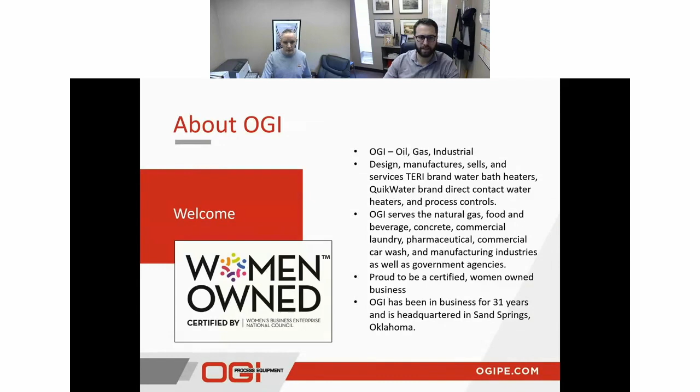Thanks, Chris. I want to start a little bit by walking you guys through our facility and capabilities if you're not familiar with us or our company.

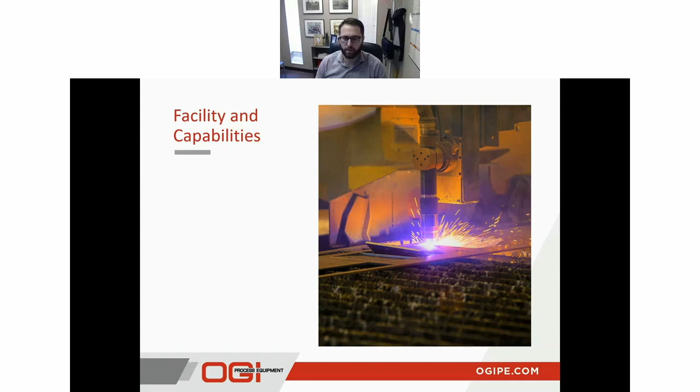Some of the things I like to highlight, most importantly, is that everything we do at OGI starts here and ends here. From the first quote you send us, we have a full engineering staff that will design and quote that for you. And then from there, we've got our own production facility where we design, build, and test everything on site, and we'll even perform a FAT on it before it leaves.

We've got a 50,000 square foot manufacturing facility, with several different things on site to help us through the manufacturing process, and we also have a UL listed panel shop.

Chris mentioned the Total Arc Relighter, which is one of our patented products, but we also do many other different control schemes for various things, which I'll address towards the end of the presentation. All of that is done in our UL panel shop, so we were able to achieve that certification on all the panels leaving our facility.

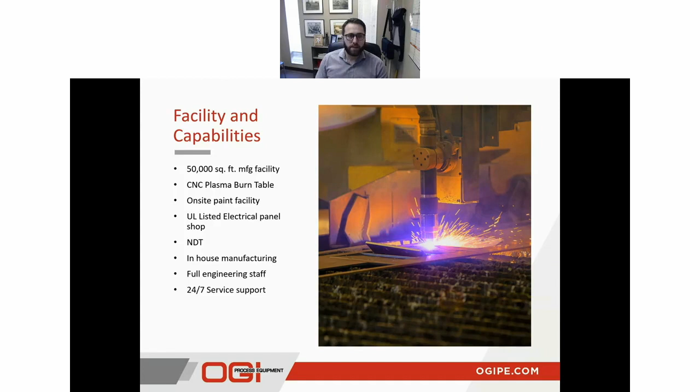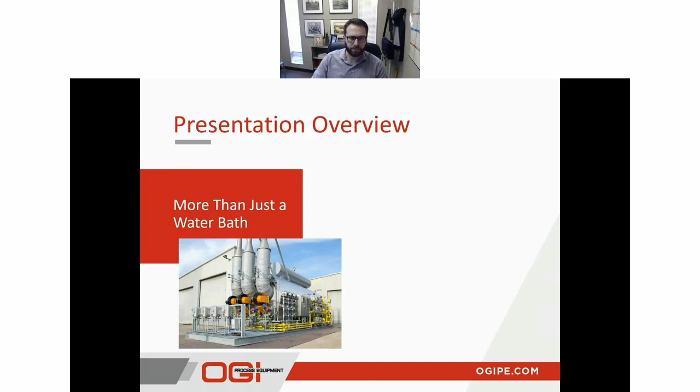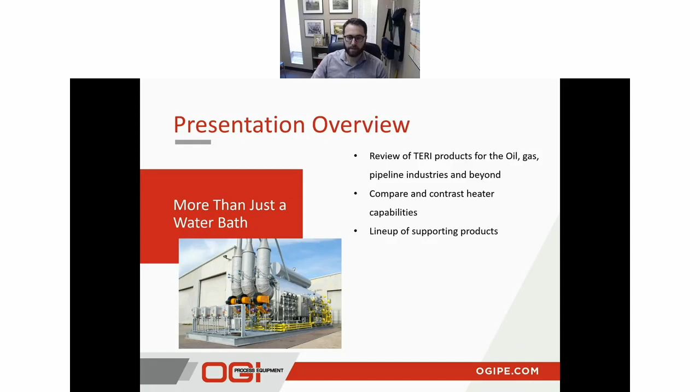So with that, we'll get into a little bit of the overview of this presentation. From the title, more than just water bath, obviously we're going to be discussing some of the different types of heaters that we offer. We'll review the different products for the oil, gas, and pipeline industries, and then compare and contrast some of the heater capabilities, both for water bath heaters and some of the other types of heaters we supply. We'll also review some of our supporting products, such as controls and some things like that.

So I broke things down to give us a better overview and be able to compare and contrast a little easier. We're going to start by going through our water bath heaters. On the left here, you can see the types of water bath heaters that we offer, starting with the natural draft, which is our most basic. We'll build from there into forced draft heaters, fuel gas heaters, vertical heaters, and finally electric heaters. After we've had a chance to review those things, we're going to get into an additional type of heaters, and review vaporizers and glycol dehydrators. A vaporizer is somewhat still a water bath, but it's performing a slightly different function, which is why I've broken that into a second option, and then we'll end with supporting products.

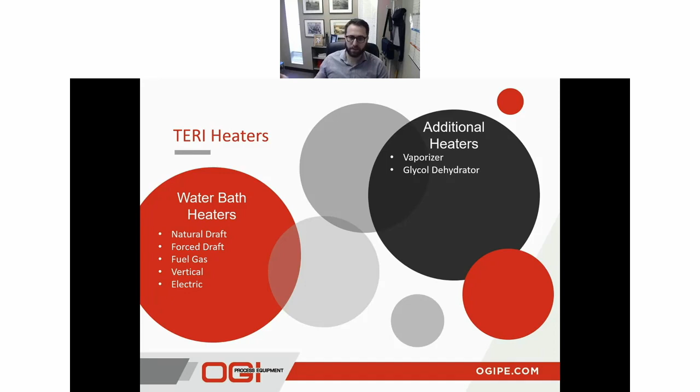So the first thing I want to cover is features that are going to be standard to all TERI heaters. Everything that leaves our facility is going to adhere to these bullet points that I've highlighted here.

For us, from an engineering standpoint, from a sales standpoint, and all of management together, it's very important to follow all the codes that lead our industry. So, most importantly, we're always going to be building in accordance with API 12K. Along with that, you'll see ASME CSD-1 for all of our fuel trains. And we're also going to be using NFPA 86 and 87 where applicable.

Even though these are not technically requirements, they're something that we'll often use based on the application, where the heater's going, or even if the customer requests it. So, all that to be said, if there are any specifications you need to adhere to that you're not familiar with, that's where we can come in handy.

We've got a lot of experience. We've been doing this, like Chris mentioned, for over 30 years. We've got a lot of experience here that can reference these specs and make sure the heater is meeting those and your controls are meeting those, and even help you outside of that with anything. So certainly, feel free to ask those questions when we're working on things together, and we're happy to help.

One thing I'd like to also highlight is our coils. The coil is one of the most important parts of any of these heaters, and that's why we take our inspection process very seriously. A lot of the time, we're really only required to follow the ASME standard, which is just to inspect one weld on the entire coil, and that approves it.

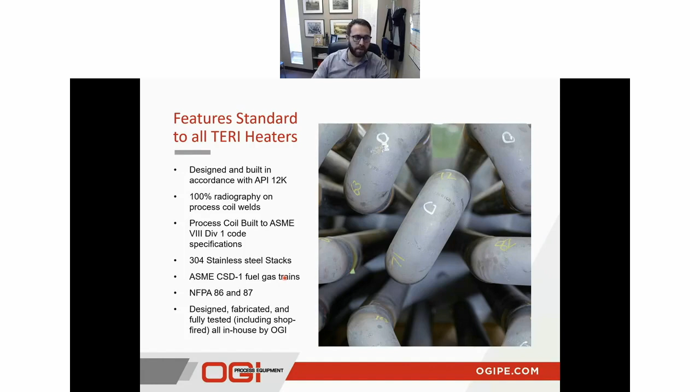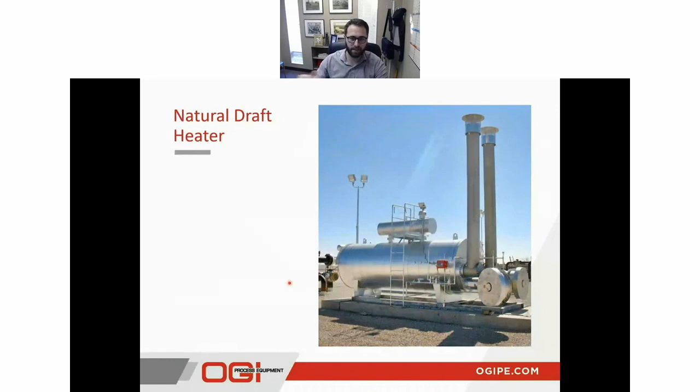So with that, let's get into our first heater. I'm telling you a lot of things you've already heard with this heater, but I just want to set that baseline to get us into the remainder of the heaters. The natural draft heater is just the most basic type of water bath heater.

It's a straightforward design. It's compatible with all different control schemes, whether you just want a simple push button all the way up to a BMS or even beyond that. It can do all those things; it really just goes back to what you're looking for. This is a heater that we use in a majority of our applications. Most of the time it's going to fit what you need it to do.

There are certain cases when this doesn't become as attractive, or maybe it gets ruled out, and that's when we start to get into our other types of heaters, which we'll address and compare throughout this presentation. This is available in 1 to 3 fire tubes. As you can see here, the reference picture I've got is actually a dual fire tube. We see those all over the place.

More often than not, there's going to be a single fire tube, because they're usually handling a lower flow rate and pressure drop and things like that. But if we need to get more heat into the system, we can get up into those triple fire tube designs.

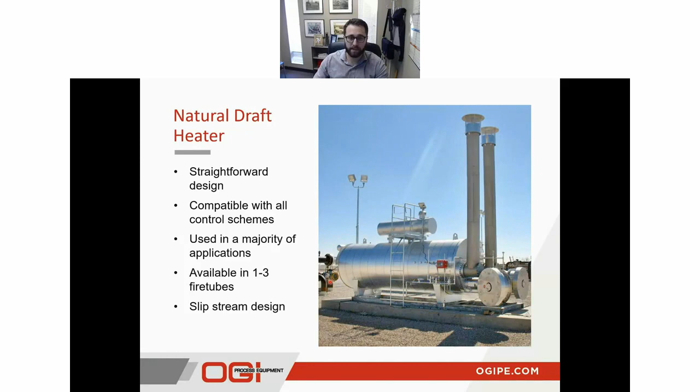The second to last thing I want to talk about is the slipstream design. I'll address how it can be used throughout different types of heaters, but the slipstream design is becoming a very popular aspect of all of our water bath heaters, and it essentially allows us to use a smaller heater, or maybe fewer heaters if we need several heaters in parallel, but still get heat into your system.

So essentially what we're doing is bypassing part of the coil, taking a hotter gas, not superheated, and blending that with the cool gas to get to your process temp. So we're still able to avoid any Joule-Thomson effects while getting it into a smaller footprint.

It seems from our perspective, there's getting less and less space, but we're seeing more and more need for gas, and so things like this are becoming more popular. And so something that's definitely applicable for the natural draft heater, and other heaters as well.

And finally, a good thing to remember, with the natural draft heater, our max output is going to be 15 million BTU per hour. So that just kind of sets the limitation of what we can do there with a single heater. Granted, we can put, like I said, multiple in parallel, or that's when the slipstream comes in if we need to get more heat into the system, but we've got that 15 million maximum requirement.

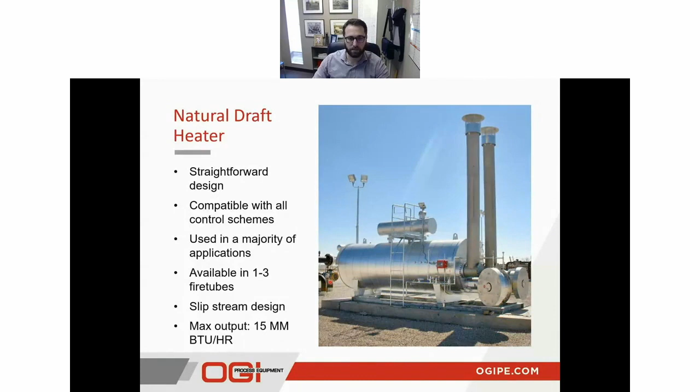So now we'll look into a forced draft heater. So this is kind of the next step from a natural draft heater, and this is going to be used in a situation where you might have a high flow application. So maybe there's more flow coming in than we can handle with the natural draft heater, and you don't have the space for more heaters, or even if you do have multiple heaters on site, you still can't achieve quite the requirements that you need. So that's when we come to the forced draft heater.

It does require more advanced controls. Typically, you can't really get away with just a relighter or a push button on these, because we've got a pretty advanced burner on this, as well as process controls that we need to be keeping an eye on and managing from a control standpoint. So you're typically going to see a BMS or maybe some type of custom controls on this. So that's something to keep in mind when you're looking for forced draft heaters.

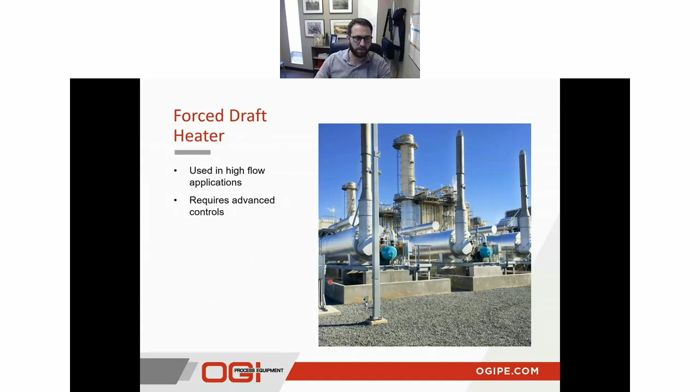Another big advantage to them is that they can meet low NOx and ultra low NOx requirements. So more often than not, when we are selling these and the customer is using them, it's because they have some type of emissions requirement at their site. And so that's something we can meet with these heaters. They are a more efficient design. So with the natural draft heater, you're only about 68% efficiency. With a forced draft heater, you get up into the mid 70s on your efficiency. And so we get a lot better combustion by forcing that air into the heater rather than using a natural draft through like a flame arrestor.

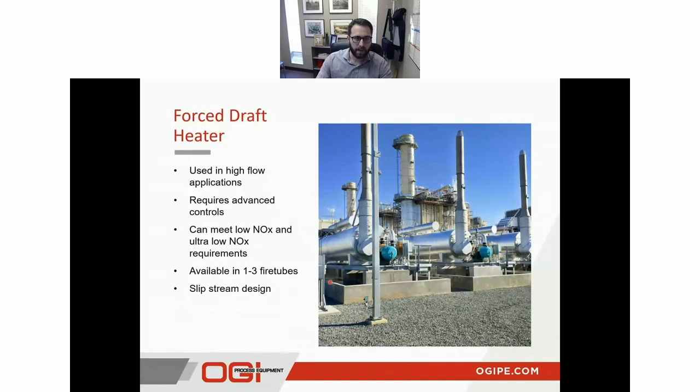It's also available in 1 to 3 fire tubes, and we can also do the slipstream design with this heater as well. And finally, just addressing the burner. So if you notice on our last slide, and I'm sure you guys are all familiar with flame arrestors, we're just naturally pulling in that air. And then this is what we would be more dealing with on a forced draft heater. We've actually got a burner and a blower.

So like I said, getting a more efficient combustion into the system, which is actually what allows us to get a better overall output. So we're going to be over 15 million BTU per hour on this heater rather than under, like we would with the natural draft. So it's a very helpful feature when you're needing, like I said, more heat input into your system, or possibly need to meet higher conditions.

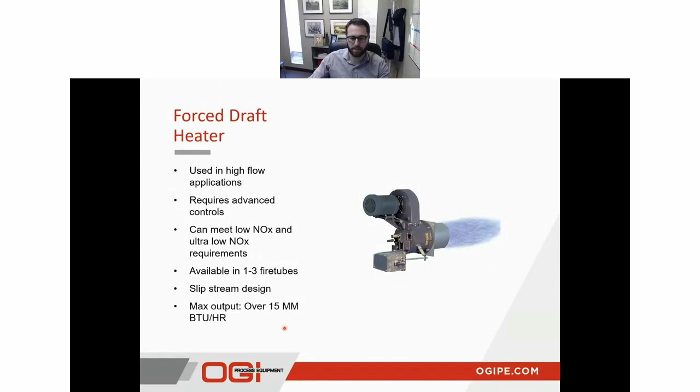So next we'll discuss the fuel gas heater. And for the most part, a fuel gas heater is not going to differ too much from a natural draft heater. Maybe in a non-educated person's view, it's just going to look just like a normal natural draft heater. The main difference is that we're going to have wider or tighter gas temperature control ranges on the heater, because with these type of heaters and their applications, we're really just taking a natural draft heater and using it in a different application. So it's important that we have more control over the temperature output of the heater's gas.

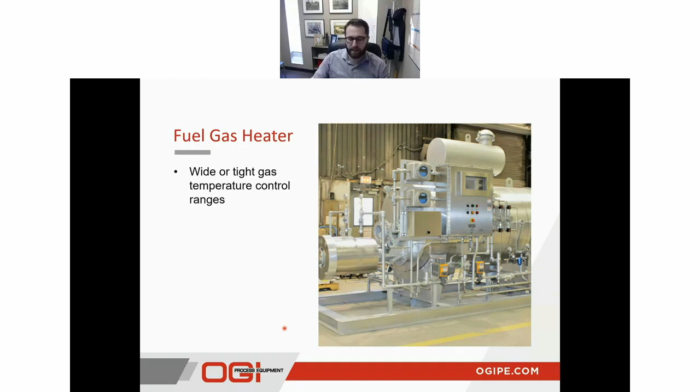And so how do we achieve that? That's through the controls, which I've highlighted here. So that's what I was saying, if you just glance at this, like, oh, that's just a natural draft heater. But maybe if you know a little bit more, you'll see, oh, this has got some different controls going on there. And so this specific one, you can see we've got a Honeywell BMS.

We still can use a slipstream and even a tempering control configuration to make sure we're getting the proper gas temp. Also, if you're having sulfur problems, it's great for elemental sulfur control. And then with these heaters as well, oftentimes we will be superheating our gas to get to those higher levels. And this one, like I said, because we are at that lower natural draft design, we are going to have a max output of only 15 million BTU per hour.

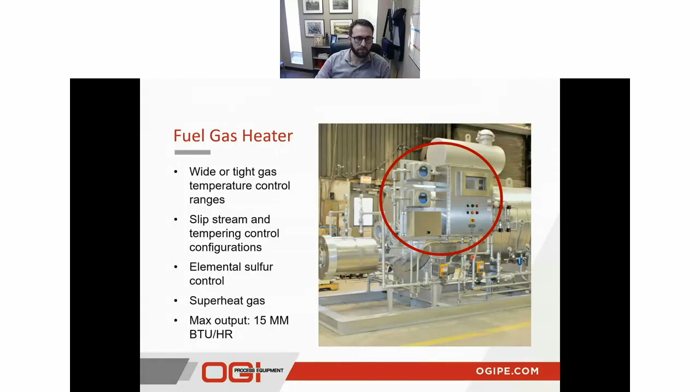All right, so next we'll discuss our vertical heaters. This is another one that's actually becoming very popular as well, for multiple reasons, which we'll highlight here. But as you can see, it's definitely a different design. The name's not very creative. We're just taking the horizontal heater and making it vertical. But from that, the internal design of the heater does change quite a bit. So as you can see, we've got a little bit different design.

So right here, this blue is going to be our burner. And we'll have a single fire tube here rather than multiple fire tubes like we would on a horizontal heater, exiting through our stack, and then our coil will come down around this fire tube so that we get good heat transfer between the heated bath media and the coil.

And through this design, we actually end up with a higher thermal efficiency than we would with the natural draft or forced draft heaters. And that mostly has to do with just that we're fighting less of the physics that you would be fighting with a horizontal heater. So that's why we see a better thermal efficiency on these heaters than the other ones.

Another obvious feature, we're going to have a smaller footprint, which is what's making these more and more popular, especially if this is going to a residential area or near a residential area. These are a lot less noticeable than some of those big horizontal heaters. We've even done some of these that are actually enclosed in a building, and so it looks like just a building with a stack, and it's hardly noticeable outside of typical utilities you would see around the neighborhood. So these are a very great design and good for those types of applications.

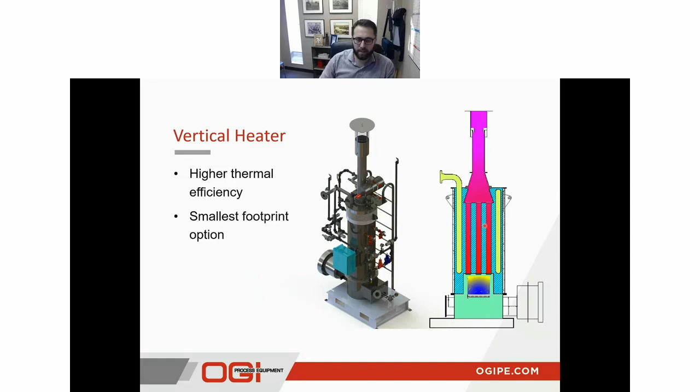Another thing I want to address is, we do have a quiet burner assembly on this one. So another reason it's going to be great for residential areas, it's going to be a lot quieter than some of our other heaters. And that's due to the type of design the burner is. I always compare it to like a turkey burner or something like that, where instead of just a single point of a flame like we would on a horizontal heater, we're going to have multiple nozzles here. So each nozzle you see here is going to be a different flame. And that leads to an overall quieter burner, which is where most of your noise is going to be coming from on these heaters. So that's a good benefit to these as well.

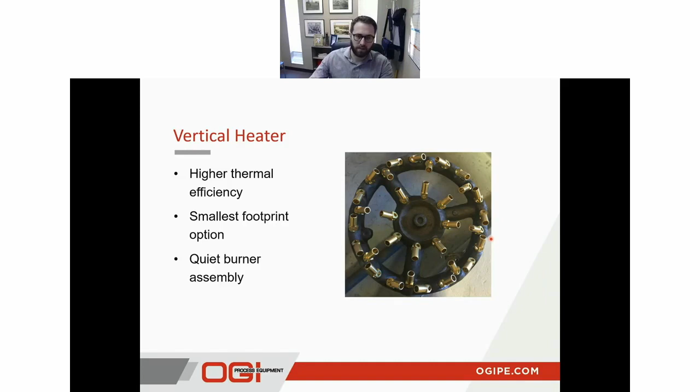The only limitation to these heaters is going to be the actual output itself. So looking at some of our other heaters, this one's only going to have an output of about 500,000 BTU per hour. So as far as output goes, it's going to be the lowest of our heater range. But for some of those residential applications, it's going to be a great fit because more often than not, you're not going to need that higher output. But just something to keep in mind as you are planning out these different projects.

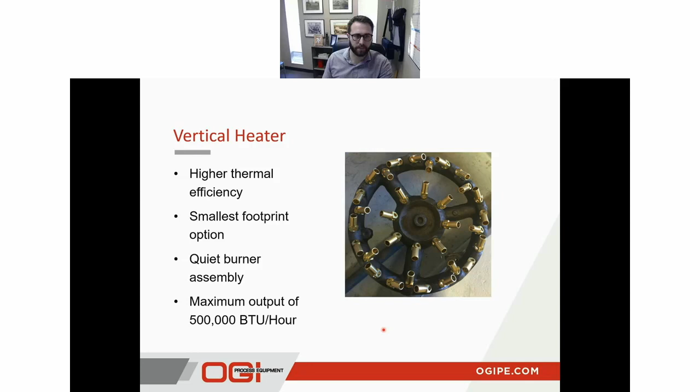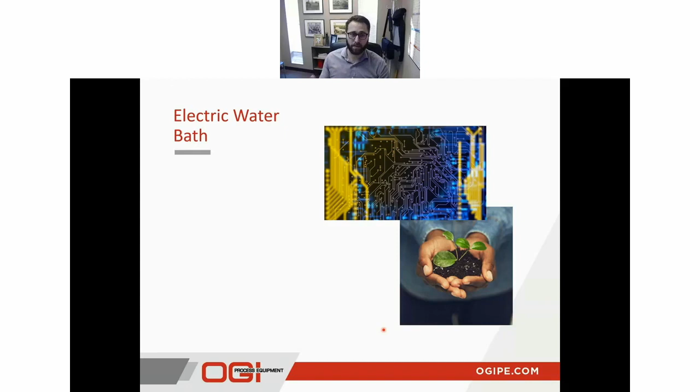So finally, we'll get into one of our newer products, which is an electric water bath heater. This has come about as part of our ESG planning, and that's because it's going to be the lowest emission option, obviously. We're not going to be having any type of combustion with the heater. We're simply going to be relying on electric coils to get the heat into the bath to transfer into the natural gas. So we've started getting this more and more out there in areas like California, Oregon, places on the West Coast that might have really tight regulations as far as emissions go.

That's something we're pushing more and more into that area, so it's a really great option for that. This is going to have very minimal operational noise. I mean basically nothing, because you have no burner again, really nothing else going on. It's going to be, in most cases, as quiet as a heater you'd have in your home.

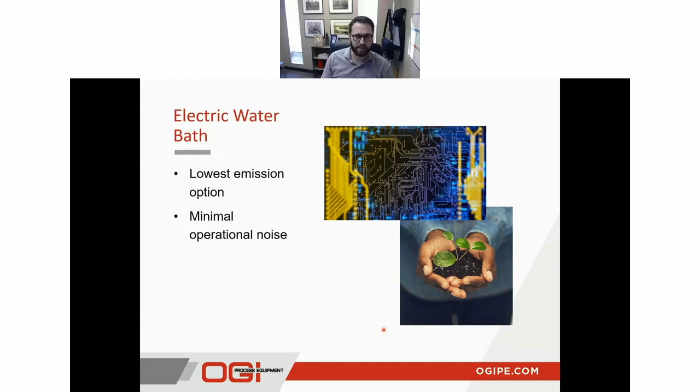So it's a great option from that standpoint as well. Another thing is the max output is going to be about 1 megawatt, and that's just kind of where our design limitation is right now. Granted, you could put these also in parallel or series and kind of increase your heat from there, but that's something that is still kind of in the design phase with our R&D group.

Just to give you some perspective on that, 1 megawatt of electricity is about 3.4 million BTU per hour. So that gives you an idea of where we're falling on that line of other natural gas fired heaters. Certainly not bad, still better than the vertical heater, but it is a little lower than some of the other heaters.

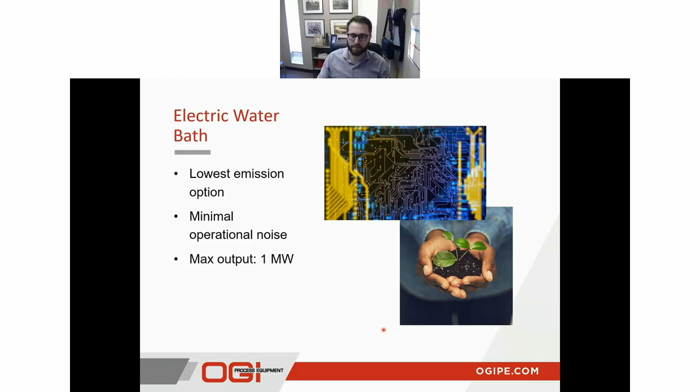Now that we've reviewed all those, I just wanted to take a second and look through the comparison. So I chose a few different categories that, for me, when I'm talking with somebody who's not exactly sure what heater they want, these are some of the questions that I ask, and it's good to think about for you guys, or also ask your customers when you're going through these.

The first thing is low NOx capabilities. If there's any type of requirements, as far as NOx emissions or things like that, that's when you immediately want to go to a forced draft or electric. Obviously, as I mentioned, in most cases you're going to end up at the forced draft just because of the output. If you remember, this is only about 3.4 million BTU per hour.

In most cases, you're going to need a forced draft, which we can get our emissions very low on. In most cases, with the regulations that we see nowadays, we can satisfy any emission requirements. It's only in certain areas, like I said, and it might even be by local levels of their requirements that you might need to get into an electric heater. But for the most part, that forced draft is going to check that box on the low emissions requirements.

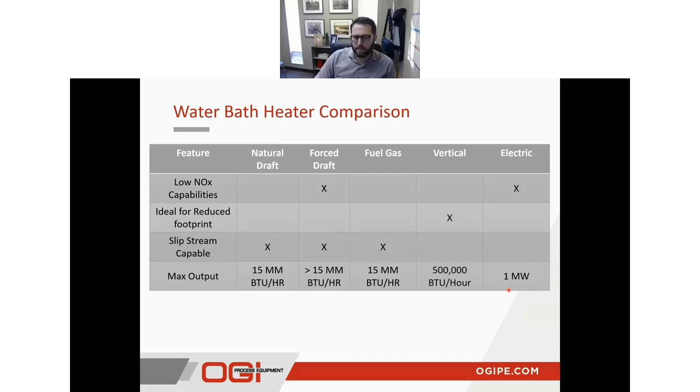So next we'll get into vaporizers. These next two heaters, the vaporizers and the glycol dehydrators, again are similar, at least the vaporizer is similar to a water bath, but they're performing slightly different functions. So I've broken those out because of that.

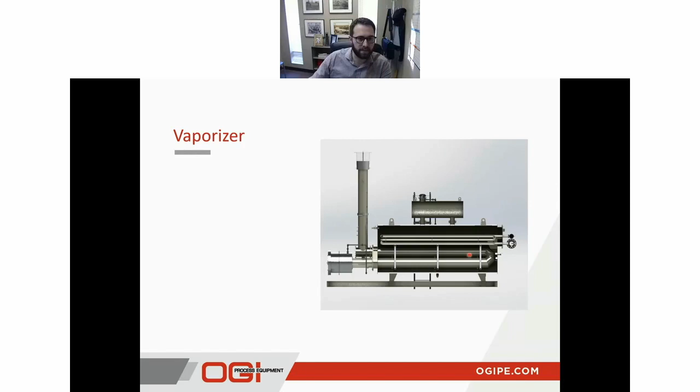Looking at a vaporizer, it's going to be very similar to what you would see on a water bath heater. You're still going to have a single fire tube, a coil, and bath media that all this is immersed in to transfer the heat. But the main difference is that our coil design and use is going to be much more important in the way that it's used rather than with our other natural gas heaters. With a natural gas heater, you can flow gas in either direction because we're just flowing vapor through there, right? There's no liquid or anything like that. But with a vaporizer, because we're flowing propane in there and the whole point is to vaporize it, it's very important that the direction of flow is maintained and used properly.

If we were to flow propane into a vaporizer on this upper coil and try to flow down, we're going to be fighting gravity, and we're going to have a very poor heater, probably one that doesn't even function, because our vapor is going to want to exit back this way. All of our liquid's going to want to settle down here, and we're essentially going to end up with liquid into our pipeline, which defeats the whole point of the vaporizer. So that's why it's very important that the direction is maintained and that we're flowing into the lower level, so the vapor has a chance to separate from the liquid and rise up through the coil.

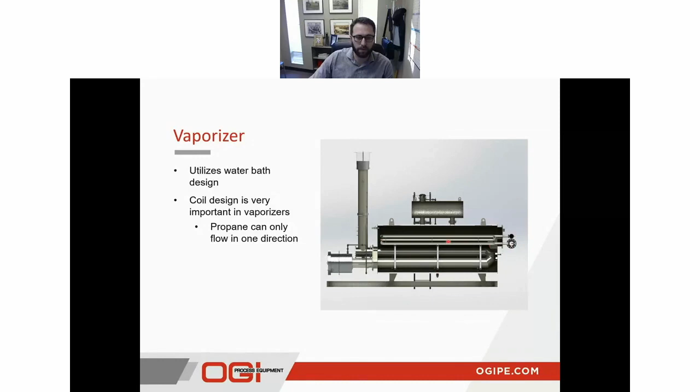And the last thing, the vaporizers do use slightly different codes than some of the other water bath heaters. Granted, we're still going to be using API 12K, CSD-1, those type of things. But there are three other codes that we'll be using, which are the DOT 192, NFPA 59, and NFPA 58.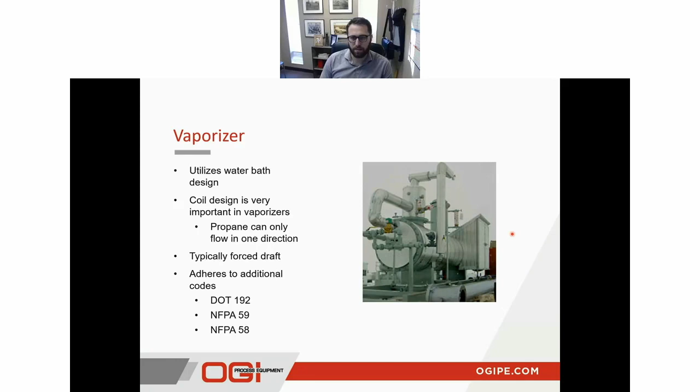So the NFPA 59 is going to be primarily used for utility companies that are buying these vaporizers. It's a code that applies to their usage and regulations when using the propane to supply multiple users. So that's kind of the key word in NFPA 59: multiple users.

NFPA 58 is going to be more for privately owned situations. So if you were a manufacturer or something like that, and you're just having this to use propane for your site, NFPA 58 is going to be the code that applies to you, since you're not distributing this to multiple people or something like that.

Oddly enough, a trailer park would actually fall under NFPA 58. So even though they're privately owned and distributing to multiple people, they can still use NFPA 58 rather than NFPA 59. So just some good codes to use and maybe refresh on if you're not familiar with them. But again, we've got the experts on that, so any questions, we're always happy to answer those, or presentations, whatever you might need.

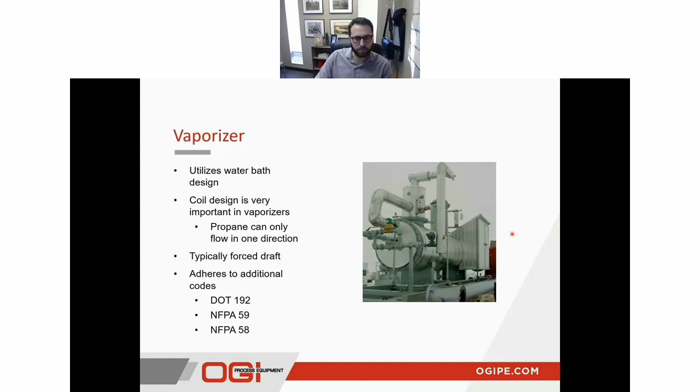So I wanted to quickly compare a vaporizer versus a heater. The features I've highlighted here are essentially from a controls and burner perspective. So the first thing we'll look at is what both of them have.

Both heaters are going to have all of these: low water, high water, low gas, high gas controls, as well as a water temp controller. Those are just essential safety functions to the heater, something that we have to be keeping an eye on, and those are really all from a safety perspective.

The one thing that a heater is going to have that a vaporizer won't have is the process temp controller. And that's essentially only because of these last three items, which a vaporizer has and a heater does not. If you think about the things we talked about with a vaporizer, what we're doing is separating those two phases, the liquid and the gas, so we don't care so much with a vaporizer about process temp.

What we really do care about is liquid carryover. When that liquid carryover is happening, that means our heater is not functioning properly. The two ways we can monitor that are through a low water temp and minimum process temp. So if our bath temp is below its minimum design, or our process temp has dropped below its minimum design, we're most likely going to start having liquid carryover. By monitoring these three things, we can actually keep an eye on the liquid carryover from the vaporizer to make sure it's functioning properly, that we're not getting liquid into the pipeline, and we're only getting vapor.

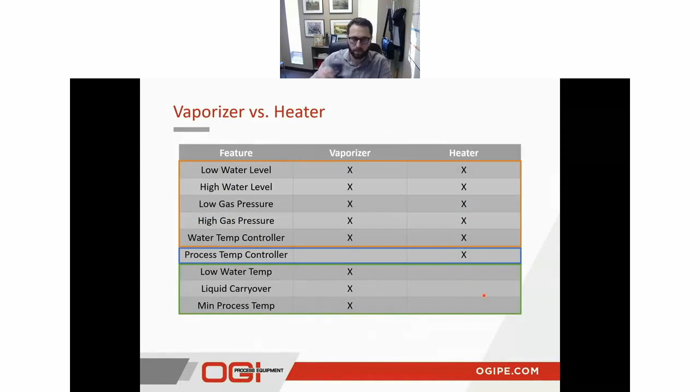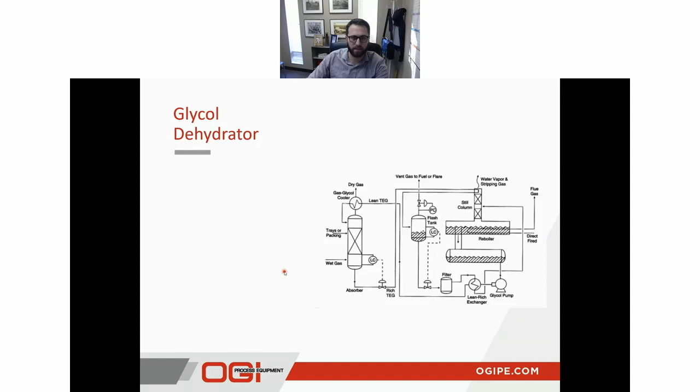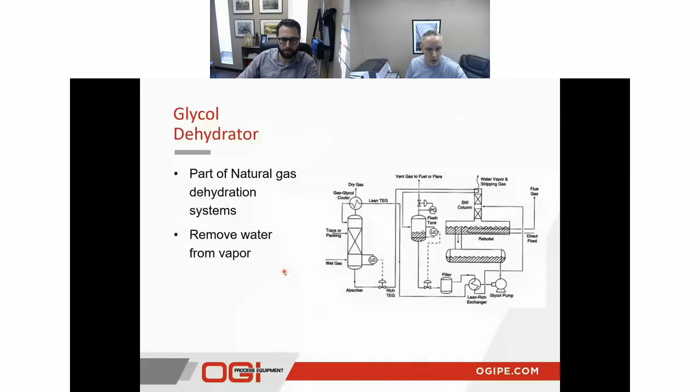All right, are we on the glycol dehydrator now? Let me know if you guys can't see that. So sorry if you didn't see any of that. Chris, can you see it? It looks like for me it's still on vaporizer versus heater. If anybody in the audience can comment on that, maybe it's just my screen. I haven't seen the glycol dehydrator slides yet. Ultimately, if we have to move on, we will have this presentation available for download, so those slides will be available if this little glitch doesn't work itself out. Okay, well, I'll just keep moving forward.

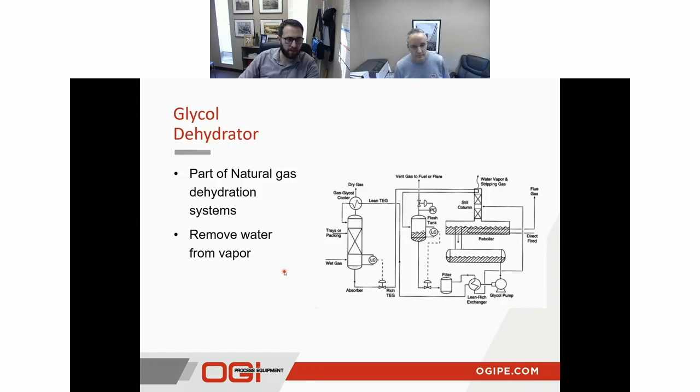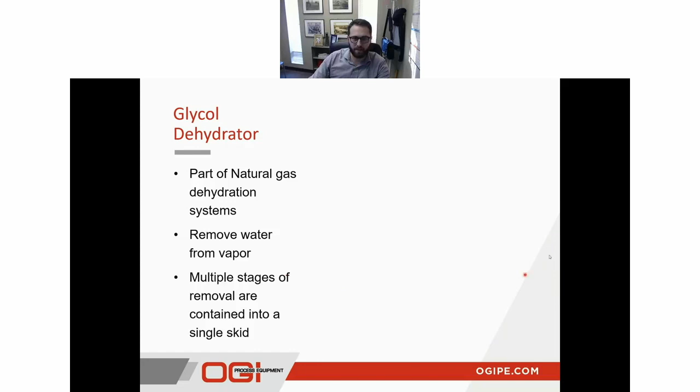Overall, multiple stages of removal with the glycol dehy, and it's all contained in one skid. So even though it's a fairly overwhelming P&ID, this is ultimately going to be contained in a pretty consolidated skid. So all those things we just discussed are all right here.

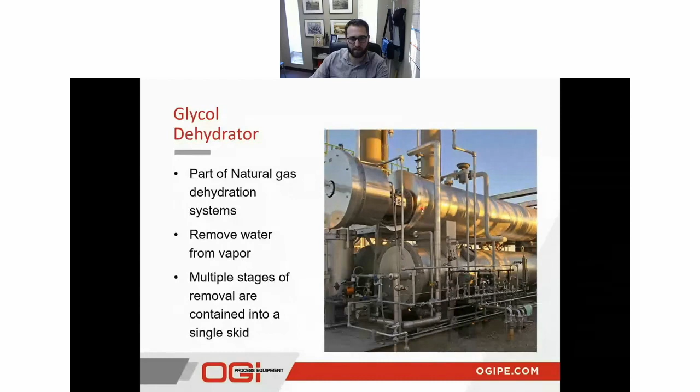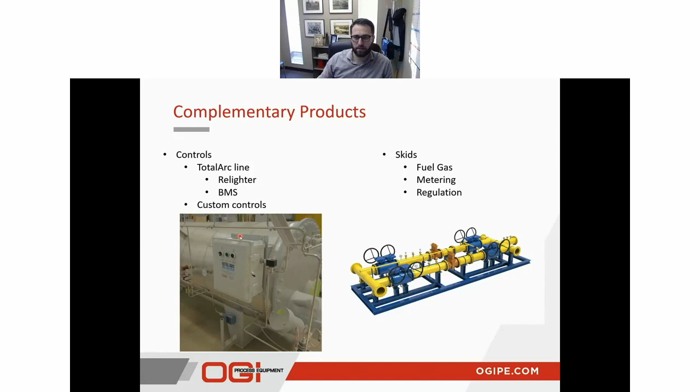On top of that, we also do custom controls since we do have our UL panel shop. We've done a number of things, including carbon monoxide monitoring systems for plants. We're also starting to do custom controls for catalytic heaters. So if you want more control for your catalytic heaters rather than just having that on-off function, we can provide controls that will allow those catalytic heaters to modulate based on the temperature.

The last thing I want to address is the different types of skids that we offer. We offer fuel gas skids, metering skids, and regulation skids. This came as something we saw as a very important addition to go with most of the heaters that we're already selling into the industry.

On top of that, we're essentially already experts in this field because a lot of our heaters have fuel trains that are very similar in design and design principles to a lot of these skids. So we saw this as a necessary product to start bringing to our customers and something we can provide as part of our heaters. We can sell you a fully functioning heater and skid together so you essentially have a plug and play application. Definitely something we're excited to be doing, and if you guys have opportunities, we'd love to talk to you more about those and some of the advantages you have by going with skids through us. So that is all I've got.